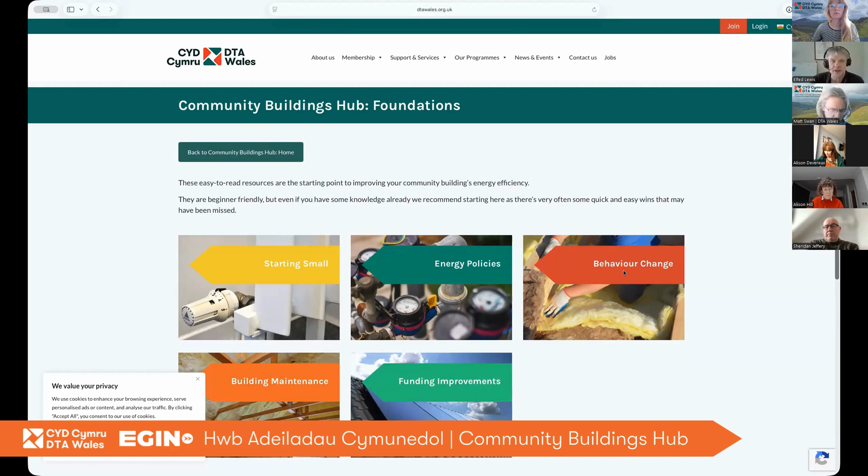So this is the Community Buildings Hub website. We'll put the link in the chat shortly. This has a number of different articles on different topics within foundations - building maintenance, behaviour change, how to fund some of the measures you might want to do. The section we'll actually be dealing with today is within the technical section - this document here on insulation. I'll go through some of the topics in there, but if you want to look at it in more depth in your own time, you can go onto the Community Buildings Hub, into the technical section, and read the insulation document.

Okay, I'll just start my presentation. Hopefully my insulation presentation is showing up for you. Thank you.

So these are the topics we're going to look at in today's session: how does insulation work, how does it save energy, what are some of the insulation material types we could use on community building projects, should we do internal insulation, external insulation, or even cavity wall insulation, and what are the advantages and disadvantages of these different types.

Another important question is how much insulation should we put in. We'd all love to put two feet of insulation around our buildings to make them nice and warm and cheap to run, but that's not always practical. So what are good targets for the amount of insulation to put on a building? How does it save us money, and how much? Particularly if we're funding this ourselves, we want to know how quickly we'll get the money we invest in insulation back.

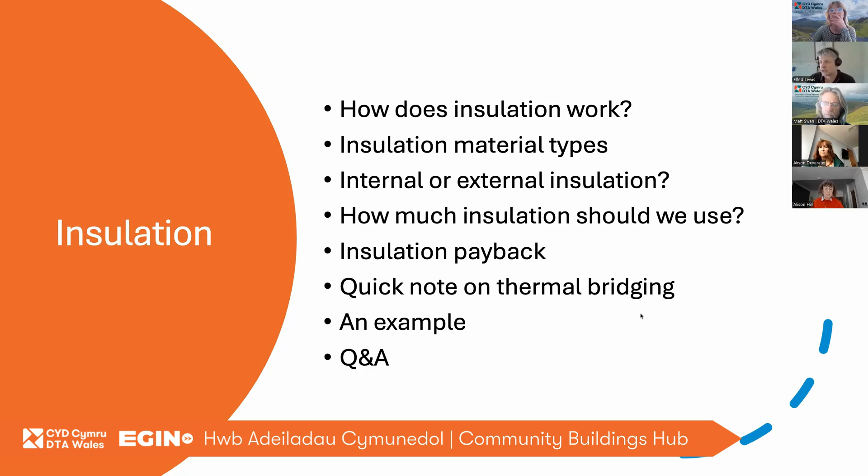So how does insulation work? We measure how effective something is at insulating our building as either a U value or an R value, and these two are related. If something is a good insulator, its U value will be really low, or its R value will be really high. Both values show the same thing, but with a U value, the lower it is, the better the insulation; with an R value, the higher it is, the better the insulation.

If we look at a solid stone wall, the types we see all over Wales - old chapel buildings, rows of terrace housing with solid stone walls - it can have a range of values depending on the thickness of the wall. But typical values we see for a 2-foot thick solid stone wall with concrete grout acting as pointing is 1.6 watts per meter squared Kelvin.

What this means is that a certain amount of heat will escape through 1 square meter of that wall, multiplied by the difference in temperature between inside and outside. So if it's freezing outside, 0 degrees, and 20 degrees inside the house, we multiply 1.6 times 20 to give us 32 watts escaping through 1 square meter of wall.

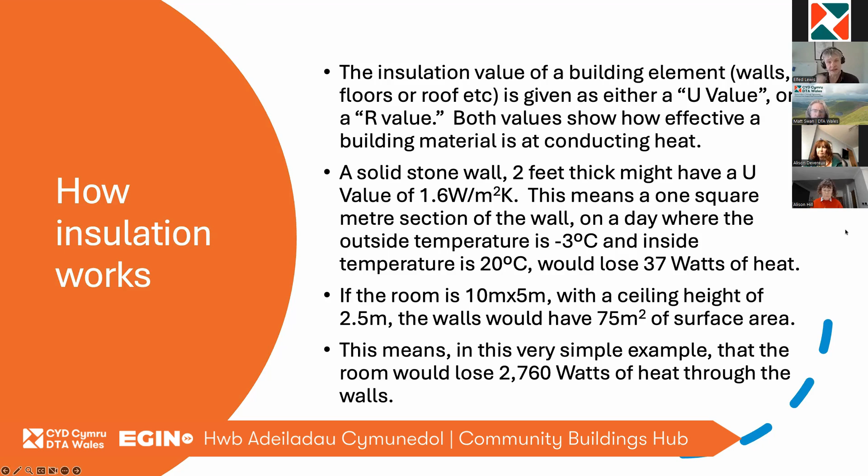But obviously our building isn't 1 square meter in size, otherwise it would be a very small building. So what we now have to do is measure the walls in our property. In this example, we've got a large room, 10 meters by 5 meters, with a ceiling height of 2.5 meters, giving us 75 square meters of wall surface area. So if we want to know how much heat is escaping through the walls, we multiply 37 watts per square meter by 75 square meters, giving us a final figure of 2,760 watts of heat escaping through the walls of this building.

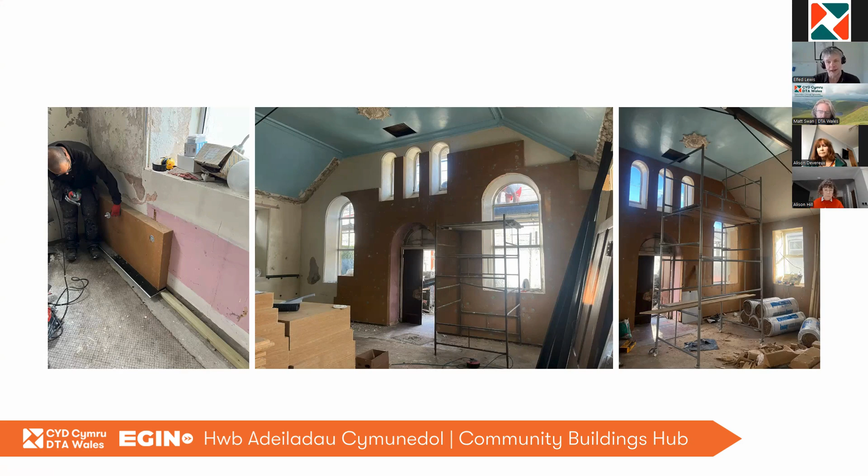What we might then want to do is insulate the walls to reduce the heat lost through them. This is a property I insulated in Trawsfynydd - an old stone chapel building with 2-foot thick solid stone walls, exactly the type I've just been describing. We added 100 millimeters of wood fiber insulation to the walls. As you can see, the insulation is applied internally because we're in the Snowdonia National Park - they wouldn't let us apply it externally, so we applied it internally.

So if we take this example of this building, adding 100 millimeters of wood fiber to the wall, there's a calculation we can do to work out how much this reduces the U value of that wall. I've done the calculation here because it's somewhat complicated, but this reduces the heat loss through the wall down to 0.3 watts per square meter. Doing the same thing as the previous example, we multiply that by 75 square meters of surface area and by 23 degrees, the difference between -3 and 20. We can now say that by insulating the walls, we've reduced the heat loss down to 520 watts.

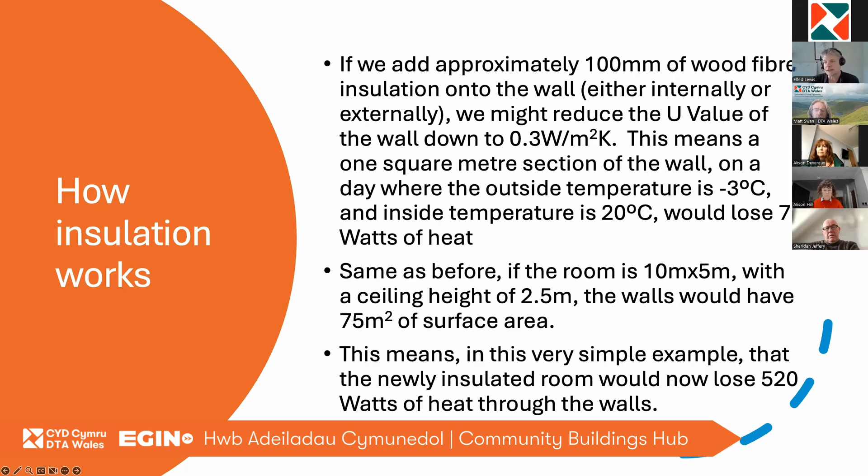So we're losing a lot less heat now through the walls of this building. We can do exactly the same thing for the roof. An uninsulated roof has a wide range of values depending on the material - is it plasterboard, are there wooden joists, any lime put up in the attic void, is it ventilated or not. But we could say a typical ventilated attic space with no insulation at all could have a U value of 4.6 watts per square meter. The roof is 50 square meters, 5 meters by 10 meters, same as the previous example. So doing the same calculation again, the ceiling loses 5,290 watts of heat.

Building control today, if you were building a new property, would tell you to put 300 millimeters - well, they actually say 270 millimeters of insulation, but it tends to come in 100 millimeter rolls, so you'd typically put 300 millimeters in. If we added 300 millimeters to this example, we'd take the U value down from 4.6 to 0.13, a substantial reduction in heat loss. The amount of heat lost through the roof would go from 5,290 watts to only 150 watts, which is a massive saving.

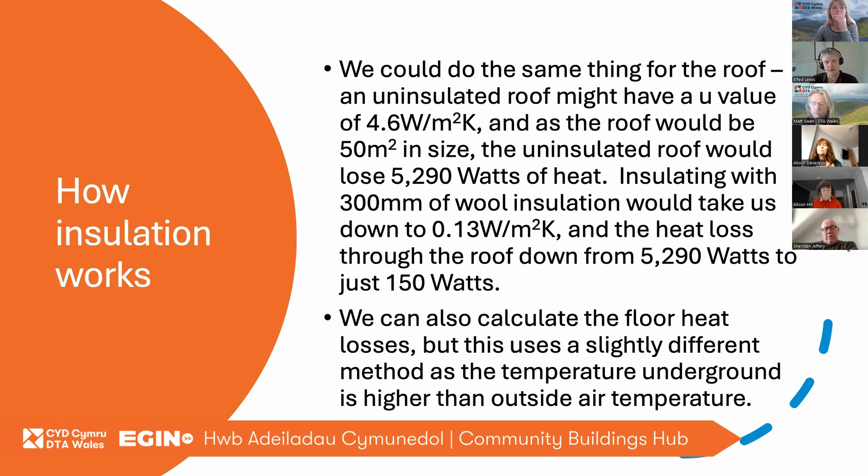But I would expect maybe 1,000, maybe 1,500 watts of heat could be lost through the floor. Adding insulation to the floor might reduce that down, depending on how high you can build up the floor on top of the existing floor. It might take it down to maybe 500 watts again. So it's a significant saving, but it tends to be much less than with both roof and wall insulation.

We would usually say that any gaps in insulation in a property, either wall, floor, or roof, will reduce the effectiveness of the insulation. So this would probably have on average maybe 200 millimeters of insulation, but because of all these gaps, it would be as if this property had only 100 millimeters of insulation.

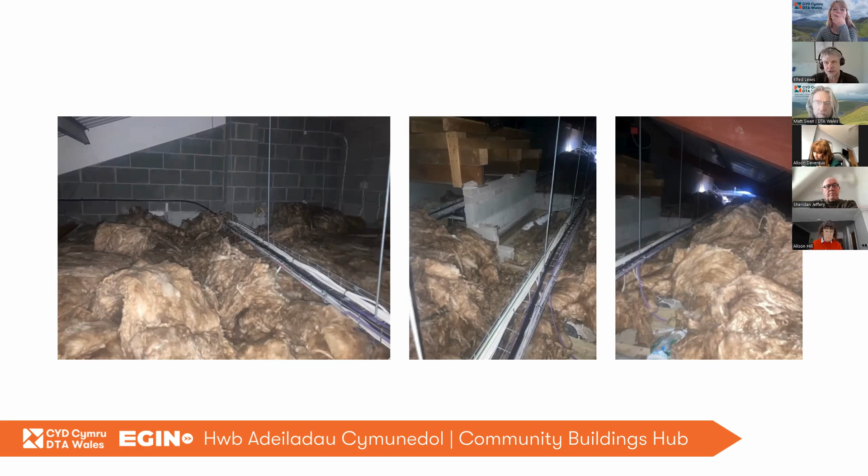What I would like to see as an energy assessor in this property is the insulation laid out nicely and neatly in rows, going across for the first layer and then down the room in the second layer, with all the layers overlapping and with no gaps between them. That was my recommendation to this particular group, to relay this insulation and make it slightly neater.

So we could say for this small example here, a small building 10 meters by 5 meters, there could be as much as 8 to 10,000 watts of heat loss through the walls, roof, and floor. We could fairly conservatively reduce this down to 1 to 2,000 watts of heat loss by insulating the walls, insulating the loft, and maybe putting a minimal, maybe 30 millimeters of floor insulation so that we don't raise the level of the floor too much.

Now, there are other heat losses in a property through windows, through doors, through drafts, and things called thermal bridges. But it does give you a rough idea of how much potential energy you can save by insulating a property.

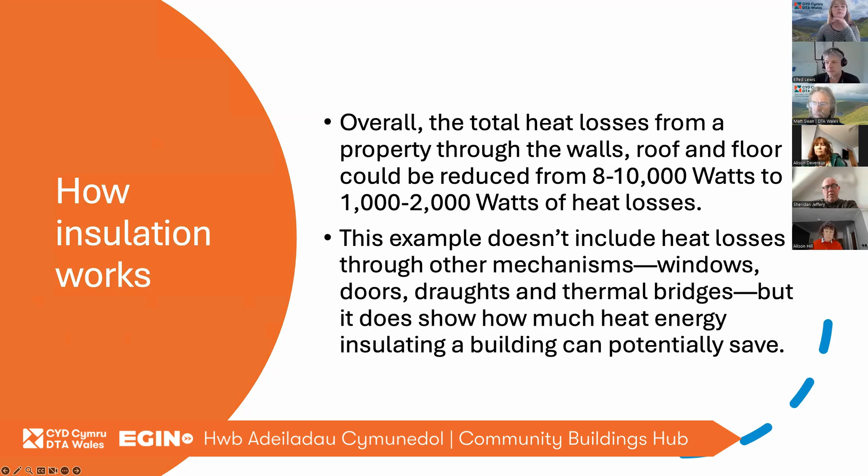Translating this into money, if a room needs 10,000 watts to stay warm with 10,000 watts of heat losses through the walls, then we need to add 10,000 watts of heat into that room to keep it warm. If we've got electric heating and we're paying 30 pence per kilowatt, this is actually costing us £3 per hour to keep the room warm. This doesn't include getting the room warm before you arrive, just keeping it warm while you're in the property.

Now, if we've reduced the heat losses down to 2,000 watts, the hourly running cost is now 60 pence per hour. So we've reduced it down to 20% of what it would have been before we insulated the properties. We're not counting some of the other heat losses here, which will also add to the cost. But just the heat losses through the walls, the roof, the floor, we will have saved £2.40 an hour in running costs for this particular example property. If your property is 5 times the size and a similar type, your running costs have gone down from £15 an hour to £3 an hour, which is a significant saving.

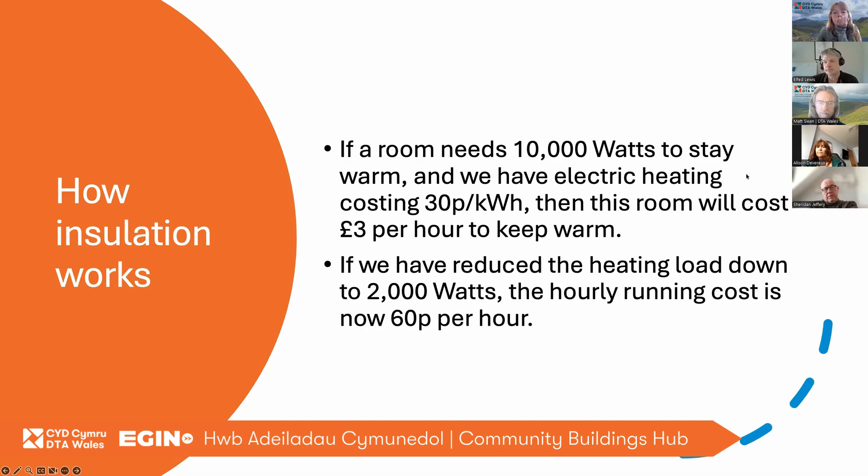The next question is, what materials would we want to use to insulate our building? There's a massive array of different materials we can potentially use. PIR, which people commonly refer to as Kingspan, but it's important to note that Kingspan is a brand, not a type of insulation, just like we call a vacuum cleaner a Hoover. Kingspan is just a make of polyisocyanurate, PIR, insulation. It's a plastic-based insulation, a synthetic material created out of crude oil essentially, used to create a plastic-type material which is also a very good insulant.

Polystyrene is another such material, a synthetic insulation material. Both of those materials are very, very good insulants, very cost-effective, but it's important to note they're not easily recyclable. Just like we have plastic waste, it's entirely possible that in 50 years' time we'll have a lot of insulation waste when people are changing the insulation in their properties. There's also some more exotic materials like aerogel or vacuum panels. These are again very, very good insulation materials, but they tend to be extremely expensive, so I don't normally recommend them for properties.

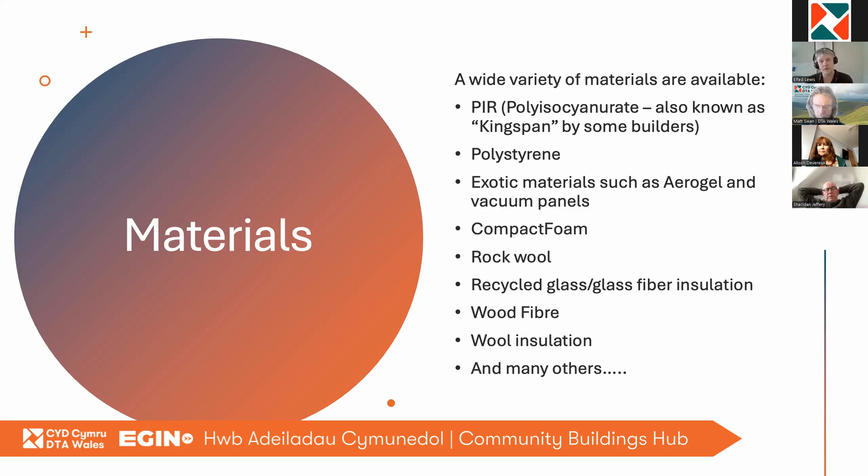There's many other types of insulation we could potentially use as well, and all of these have advantages and disadvantages. So when I look at a building project, I might want to consider the naturalness of a material. Synthetic insulation materials are great, very cost effective, save loads of energy, and I regularly use them on building projects. But I do have a bit of a soft spot for more natural materials like wood fibre and wool, and I worry about some of the long-term effects of using synthetic insulation materials in terms of recyclability and what we do when these materials reach the end of their life.

We might want to consider the material's carbon footprint, particularly the ones derived from petrochemicals. We might also want to consider, does it match the aesthetic of a particular building? Maybe we've got an old grade 2 listed church building - do we really want to be putting synthetic insulation materials with plasterboard on one side and changing things? We might look at a wall and think it's wavy and all over the place, but there's also a bit of charm to that, and using different material types will change the aesthetic of the building to some degree. Wood fibre can flex a little bit, so you can keep some of that bowing out of walls or waviness or roughness of some wall types.

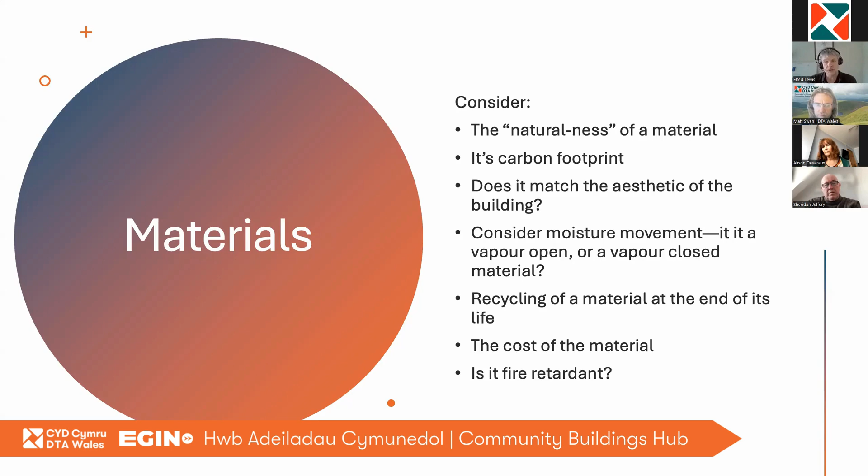Finally, is the material fire retardant? Most insulation materials are, but there are some you might not use, for example, on high-rise buildings, as we saw from the awful Grenfell tragedy. So keeping fire retardant concerns for certain building types in mind is important. Most insulation materials have a certain degree of fire retardancy. Wood fibre, for example, has a fire retardant added to the material, while other materials such as wool are naturally fire retardant. So considering that in your building project is also important.

So we've got a sense of how much we want to insulate the building, and we've decided on the material. Do we insulate inside the building or outside the building? External wall insulation, as is obvious, goes on the outside. It's typically mechanically fixed into your wall. If your wall is a bit uneven, there might be a scratch coat of plaster, maybe a lime mortar added first to level it out, and then the external wall insulation is added to the property.

There are lots of advantages to external wall insulation. One is that the bulk of your wall ends up on the inside of the property, so it can act as a thermal buffer. It'll soak up some of the heat in a room in summer and release it as nights get colder, stopping wild swings in temperature in a building - absorbing the excess and then releasing it back as things cool. But the massive disadvantage is that it dramatically changes the outside appearance of your property.

I'm involved in a project in Blaenau Ffestiniog at the moment, which is a UNESCO World Heritage Site, so we didn't even bother asking if we could do external wall insulation because we knew the answer was no. Similarly, the project I did in Trawsfynydd is in the Snowdonia National Park. We were reasonably confident they'd say no, so we just planned it as internal insulation from the start.

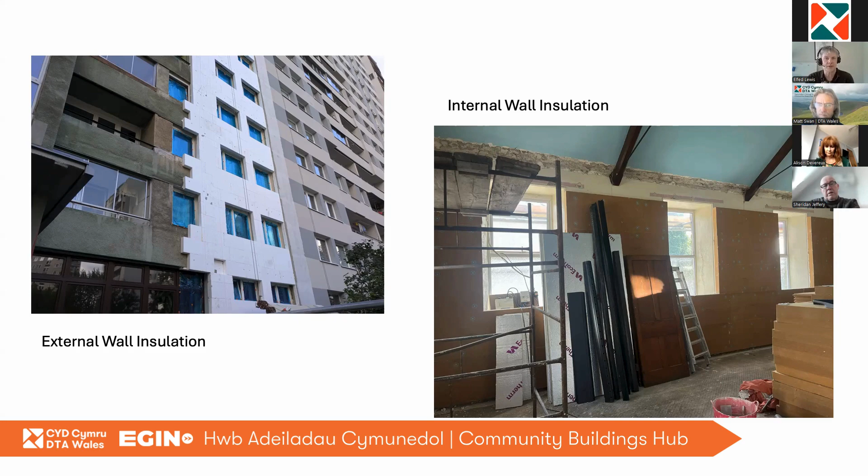There's a similar issue with loft spaces. The example I gave with loft insulation earlier is what we'd call a cold roof - on the top floor, maybe on the plasterboard between the ceiling and the attic space, we'd put rock wool or wool insulation rolled out at ceiling level. We call this a cold roof because the roof itself is then outside the thermal envelope. The heat is kept inside the property, but the roof void and attic space itself get very, very cold. The example of a warm roof, on the other hand, is where we insulate up along the rafters so the attic space is also a warm space.

There's not a massive benefit of one over the other, really. If you think you might eventually use the attic space in your community building, it might be worth doing a warm roof so the space is available within the thermal envelope of the property. But loft insulation is so cheap and easy to install - even a competent DIYer would be able to easily lay insulation in a loft space. So a cold roof has a lot of advantages in terms of cost and ease of installation, whereas a warm roof is more expensive and requires skilled labour to put in place.

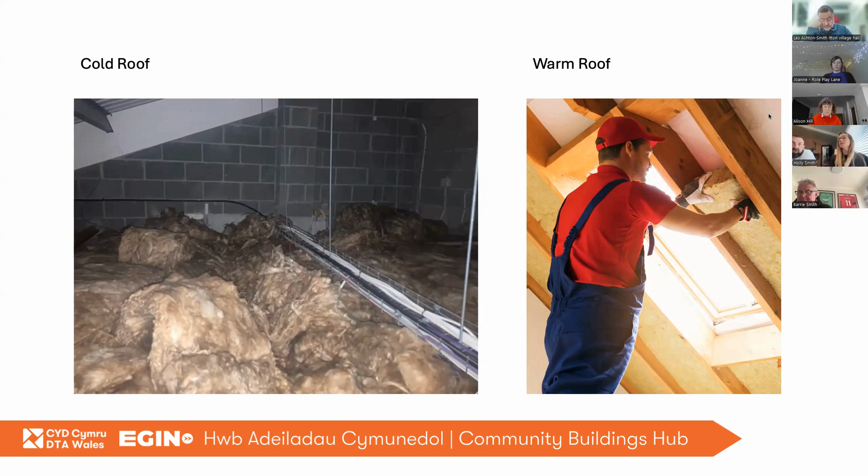So how much should we insulate? Yeah, very good question. In theory, you can put as much as you like. If you want 3 foot of insulation on your wall and you've got space for it and you've got budget to pay for it, go for it. But there are some caveats to this.

The main one is that as you add more insulation, the actual benefit you get is less and less. So the first millimetre gives you the most bang for your buck, and the last millimetre of insulation you install gives you the lowest amount.

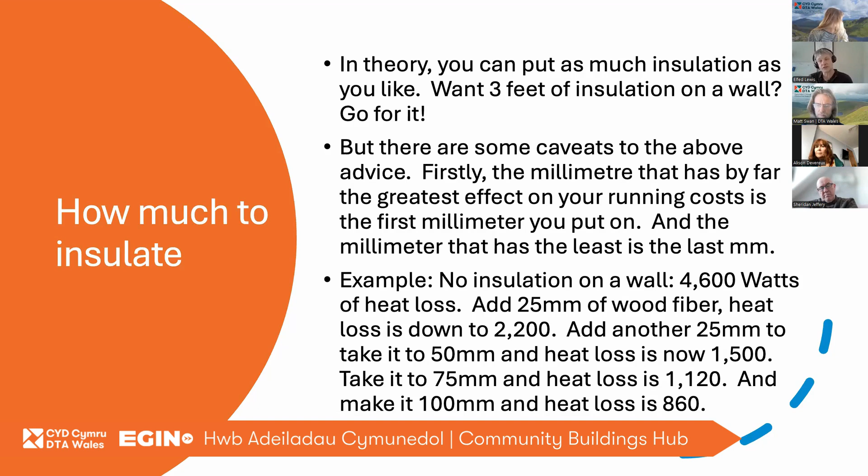So in our previous example, let's say we had a wall with 4,600 watts of heat loss. If we add 25 mil of wood fibre, that heat loss goes down to 2,200 - a 2,400 watt saving. If we add another 25 millimetres, it takes it down to 1,500, so the next 25 mil only saves us 700, less than half of what we got with the first 25 mil. The next 25 is even lower, saving only 380 watts. And the final 25 to take us to 100 mil only saves us 260 watts. So each additional 25 millimetre block of insulation saves us less and less heat as we go.

So we might say, okay, 25 millimetres gives us the most effect, so let's just put 25 millimetres on there - that would work best, right? Well, that's again not always the case.

Remember that the material cost is only a small part of the overall cost of insulating the property. I'd argue the labour cost is the largest cost in terms of insulating a property, and whether they put a 25 mil sheet or a 100 mil sheet on the wall, the labour cost will be roughly the same. Also, as you add larger bits of insulation, the actual cost per millimetre of insulation drops.

In this example, I got these prices from Insulation Superstore, a popular online website. A 25mm Kingspan board roughly works out at 52 pence per millimetre of thickness, whereas when you go up to 100 millimetres, the cost per millimetre is 34 pence. So as you have thicker bits of insulation, the actual cost per extra millimetre goes down and down. So if you priced up putting 25 millimetres on a wall versus 100 millimetres, I wouldn't expect the cost to be 4 times as much.

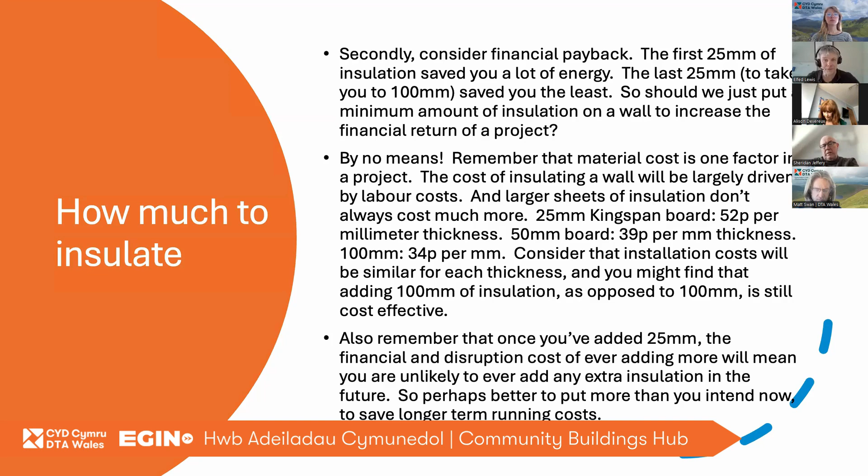If you add internal insulation, what you're doing is you're moving the dew point closer in to the building.

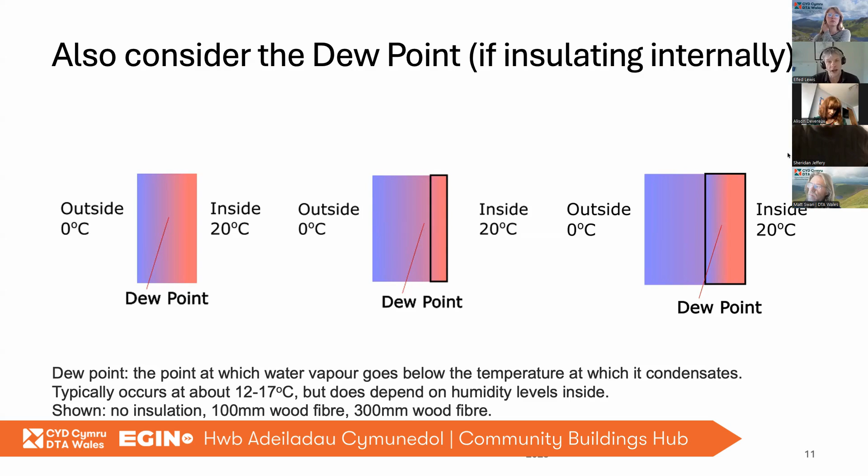Let's consider the financial side of this. Working out the financial payback can be complicated, and if you reduce the heat demand by 50%, it doesn't necessarily mean you'll see a 50% reduction in your bills. What tends to happen is when heating bills are really, really high, people kind of put up with slightly colder, damper, more unpleasant buildings.

You might have the thermostat in your community building set to 17 because it's prohibitively expensive to have it at 20. As soon as you've actually insulated your building and your running costs have come down, you'll whack the thermostat up because everybody wants to be warm and comfortable, and we want our community spaces to be warm and comfortable. That also makes calculating the reduction in actual running costs quite difficult to calculate.

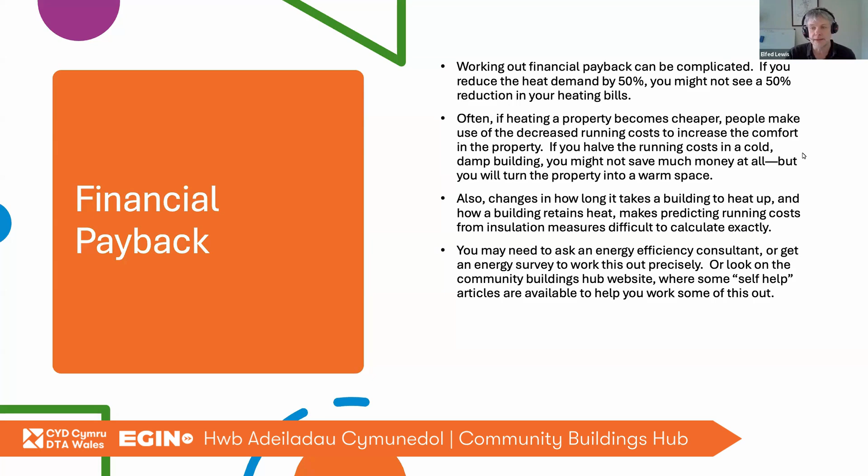You could ask an energy efficiency consultant, or you could ask for an energy survey. Again, energy surveys are available through the Egin program, and there are also other government grants available for energy surveys. Or have a look on the Community Buildings Hub website, where there are some self-help articles to help you work out some of those things.

But if you spend £3,000 a year on heating and you work out that adding loft insulation will save you £1,000 per year, and the insulation costs £6,500 to install, then you've got a 6.5-year payback period for that particular insulation measure. So if you pay for it yourself, in 6.5 years' time you will have got that money back, and for however many years the community building stays open after that, you'll be saving an extra £1,000 per year. Usually loft insulation has by far the quickest payback period, as we saw from my example earlier of 300 mil of rock wool.

The amount of energy we use went down from roughly 5,000 watts down to 150, so it will have by far the fastest payback period. Usually walls has the second quickest, but where we see 6.5-year payback periods for loft insulation, we might see a 20 to 30-year payback period for wall insulation. And then usually floor insulation has such a long payback period that we sort of ignore it and just assume it's a comfort measure, really, more than a financial measure.

But obviously, if you're lucky enough to find a grant to pay for the insulation measure, you don't really have to worry too much about the payback period - it's instant because someone else is paying. But you will have to convince the people giving you the grant that this is a worthy measure, so it's still important to calculate the payback period and try to convince them that it's a worthwhile measure for them to invest their money into.

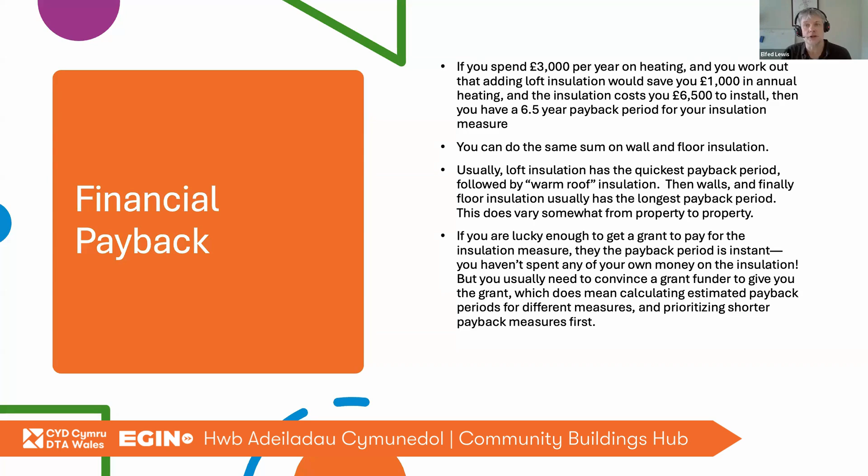So you may want to prioritize things such as loft insulation if you're applying for grants, or potentially combine loft and wall insulation if the grant is large enough, so that the overall payback period is low enough to convince the grants people that it's a worthwhile package of measures. Probably if you just asked for floor insulation by itself, they'd have a bit of a giggle and say no, because the payback period will be so long. But you could combine floor insulation with adding an underfloor heating system, so the cost is part of a larger measure of works, which might help convince them it's worthwhile.

How much does it actually cost to externally or internally insulate your particular community building? It's really difficult to say because there are so many factors, like what is the wall type? How high is the wall? Do you need scaffolding? What's the final finish of the wall? If it's inside, is it lime plaster, pink plaster, or plasterboard? If it's external, is it some sort of render, or do you have to, if you're in a national park, add a stone or brick cladding back onto your building? So it's really, really difficult to gauge it exactly.

What I typically do at the start of a project with a community group is look at a few websites. If you just Google how much internal or external wall insulation costs to install, I found an article from Green Match, which has rough costings, and another article from Checkatrade, which will give you some very, very rough costings you can use to look at the initial budget for the project.

But as soon as possible, I would encourage you to go to a local builder to give you a formal quote, and then use that formal quote as the basis for any grant application that you make.

Because obviously, if you go to Green Match and it tells you it's going to cost £10 per square metre, you measure all your walls, you ask the grant agency for £10,000, then you go to a local builder, and he starts listing all the problems that are going to happen during the project, and he gives you a quote for £25,000 - well, you've now got a big hole in your finances.

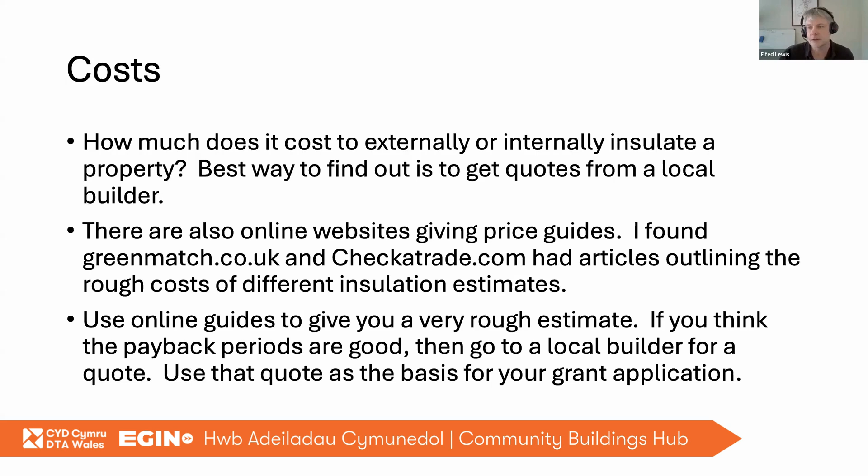There is, again, an article on the Community Buildings Hub on some strategies for obtaining quotes from local builders. Things like going to your local builders' merchants and asking them who they'd use, because they know who comes in and buys insulation off them, and they want those people to get more work. They might be able to give you a list of people to contact, and there are other tips you can use to find local builders to give you that initial quote.

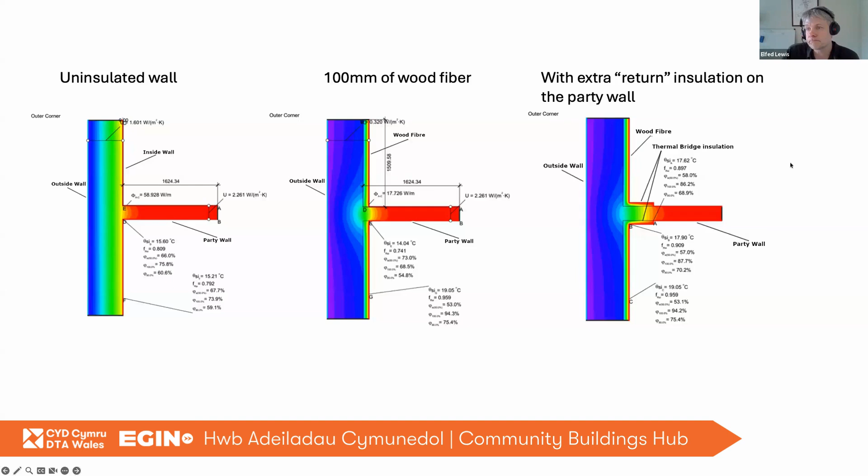So I just want to give you a quick example of a building that I've worked in. This is Capel Bach in Trawsfynydd.

Initially a Scotch Baptist chapel, which was taken over by the local WI in the 1980s, later became owned by Côr Meibion Prysor, of which my dad is a treasurer and I'm a member. This particular group was looking to redevelop their property. It was in particularly bad shape.

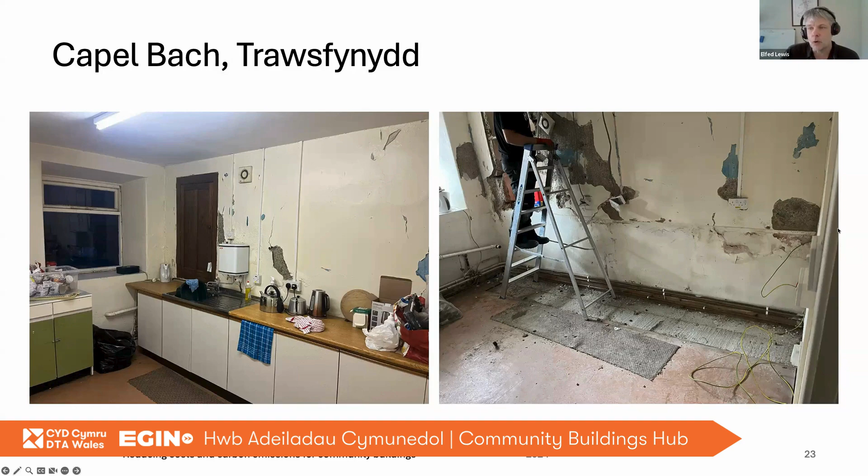So we stripped everything back to bare walls. We then started applying wood fibre. We got our WUFI analysis done, and that determined that 100 millimetres of wood fibre was safe for this particular building.

What we're doing is putting a small thin coat of lime plaster on the wall first, behind the wood fibre insulation, pushing the wood fibre into the lime plaster, and then Medi, the builder who actually did this work for us, is then applying mechanical fixings through the insulation into the wall to hold it in place. The lime mortar acts as a binder, binding it to the wall, and the mechanical fixings also help secure it to the wall.

There's a detail here. This is an internal wall between the main part of the chapel and the kitchen in the rear, where we've got a potential thermal bridging problem. We can see on the right, there's a large stone wall. If we hadn't put a little bit of insulation on the inside face, heat would have just escaped up through the stone wall, up and out of the property.

So we applied 40 millimetres of wood fibre on this internal wall just to stop that thermal bridging happening and stopping condensation from building up on this wall. And then we've put loft insulation in, the bit in orange there above the kitchen. And then we put a little bit of synthetic insulation against some problematic parts of the wall, and we applied a tanking membrane as well, just to get rid of some of that moisture. But the rest of the entire property is all wood fibre insulation, all natural materials, all easily recyclable.

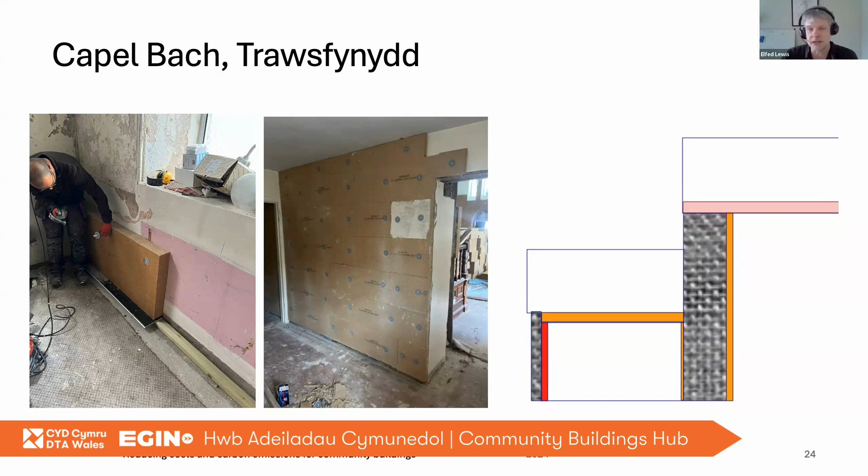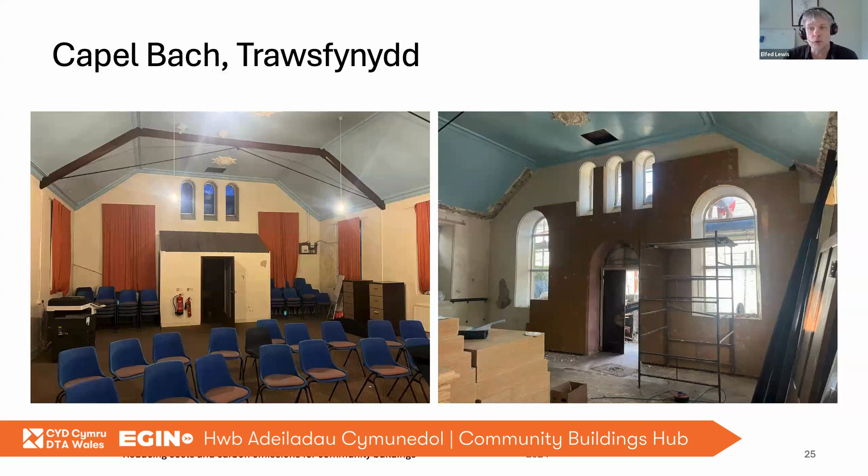This is the entrance to the chapel. There was a little lean-to that we pulled out to restore it back to how it was originally. And then we started applying wood fibre insulation up the wall, again, 100 millimetres of it all the way up.

So we carried on applying wood fibre insulation all the way up the walls, with a little bit of Kingspan and plasterboard on the sloping part of the roof - about 100 millimetres of Kingspan in total. Then loft insulation in the flat part at the top, keeping a nice continuous layer of insulation all the way through the building, from the walls through the sloping roof up into the flat attic.

We also added 30 millimetres to the floor, which was the bare minimum we could do without causing issues for wheelchairs and access into the building. Then 22 mil chipboard on top of that, and a flooring material on top of that, so we added about 50 millimetres in total of height onto the floor, giving a nice continuous layer of insulation all the way around without any gaps.

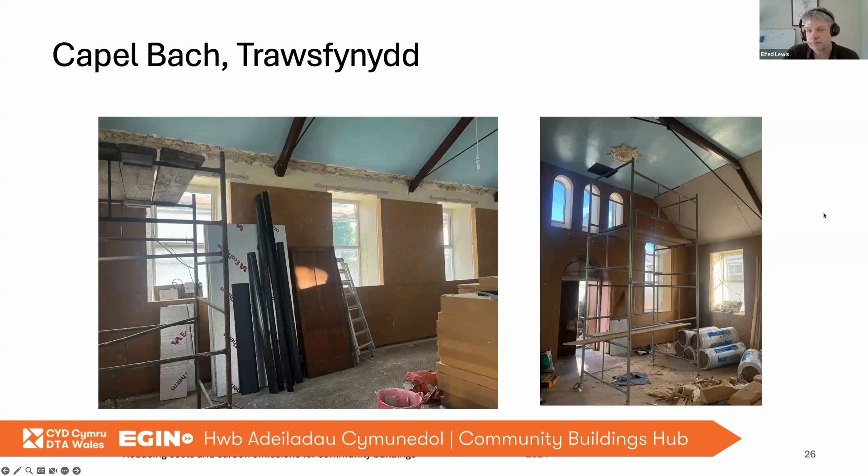Once that was done, we applied a layer of lime plaster, because again, lime is breathable - it allows water vapour to pass through. So the stone walls allow vapour to pass through, the wood fibre allows vapour to pass through, and the final lime plaster coat also allows water vapour to pass into and out of the building.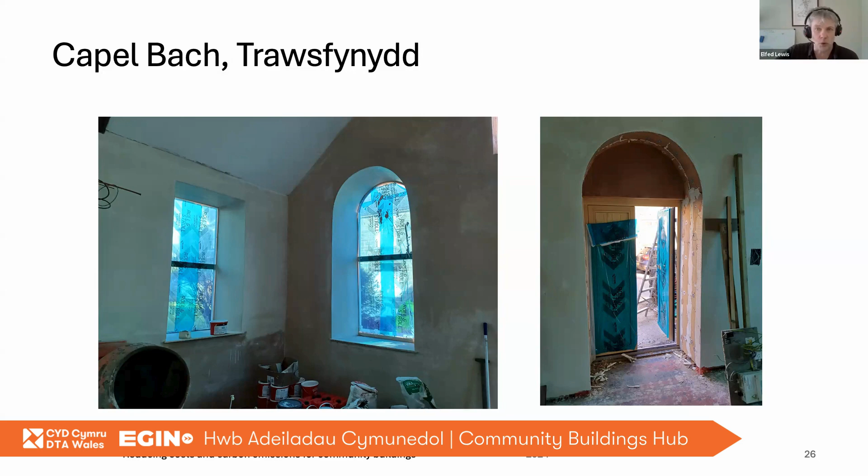You can also see an example on the right that we've put insulation in the reveals, so that between the wall and the doors and windows, that's all been fully insulated as well, to keep that continuous layer of insulation all the way through.

And then finally a coat of paint, and the building's back looking nice - probably looking closer to how it originally looked when it was a chapel, when it would have been whitewashed, compared to the horrible blue and other coloured paints that had been applied once it became a community space.

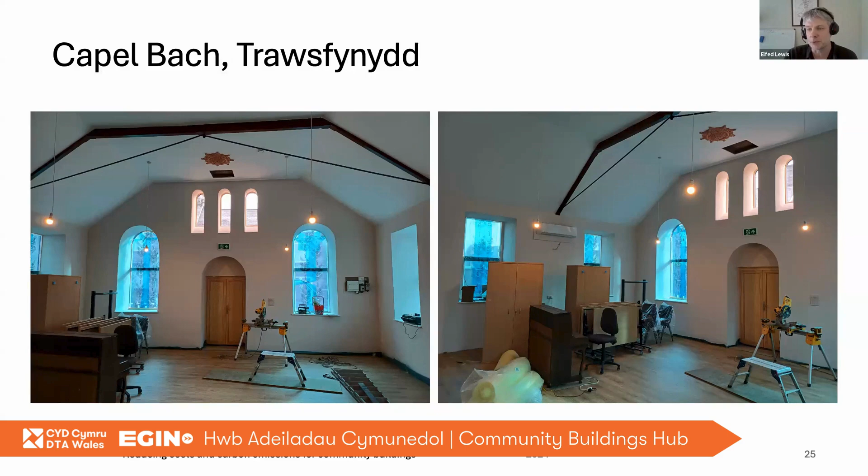You can find more details about insulation and some of the other things I've referred to here on the Community Buildings Hub - the link is there, and I believe it's also in the chat. But if you just Google Community Buildings Hub, DTA Wales, you'll find the link. There's an article on insulation, an article on other building interventions, heating systems and so on, where you can find grants, how to calculate carbon and payback periods, which are quite useful when applying for grants, as well as many other topics that might be of interest to your community building.

That's the end of my presentation. Chance for you to ask any questions you might have about insulation. I'm also interested to know if any of you have actually insulated or applied insulation to your community building, and if that's made much of a difference to your running costs.

So over to you - there is a question in the chat, great. About one of your slides, the one on costs. It's just asking about a sentence where it says that you might find that adding 100 mil of insulation as opposed to 100 mil is still cost effective.

I apologise, yes - that should read, and I will change my slide, 25 millimetres, the bare minimum, is still cost effective. So we might look at it very logically and say, well, 25 millimetres gives us the most effect for the amount of money we've spent, and so that's what we should do.